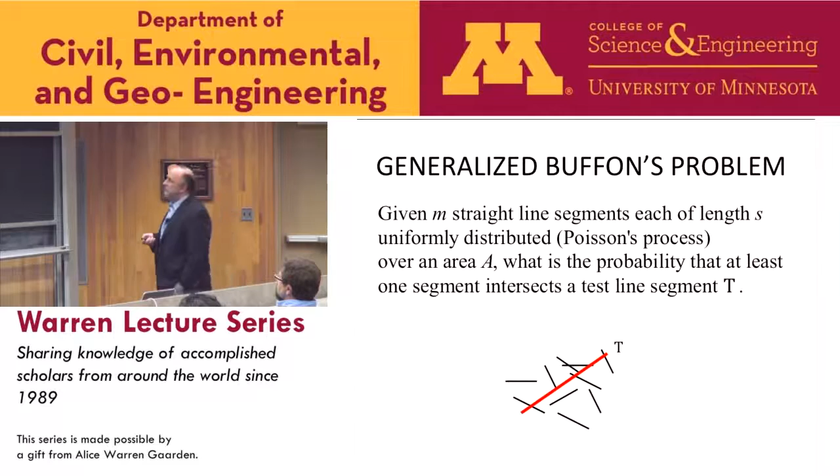I'm interested in having m segments of the same length. They're randomly thrown on the plane over an area A, and I would like to figure out the probability that at least one segment intersects a test line segment T. So the red guy is the test segment, and I'll be using it to probe the population of short segments.

Now, it is very easy to argue that if my test segment has an orientation phi, and the segment of interest, S, the green guy, has an angle phi prime such that the angle between these two is the absolute value of phi minus phi prime, then as long as the center of the green guy lies inside of this parallelogram, it will intersect the red segment.

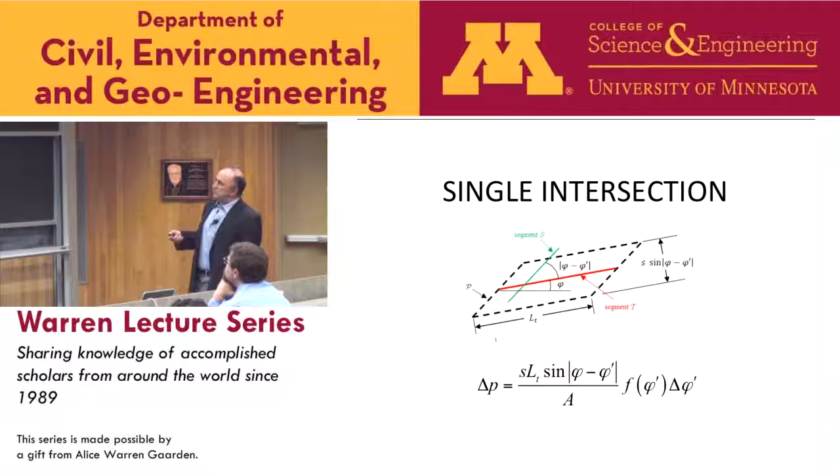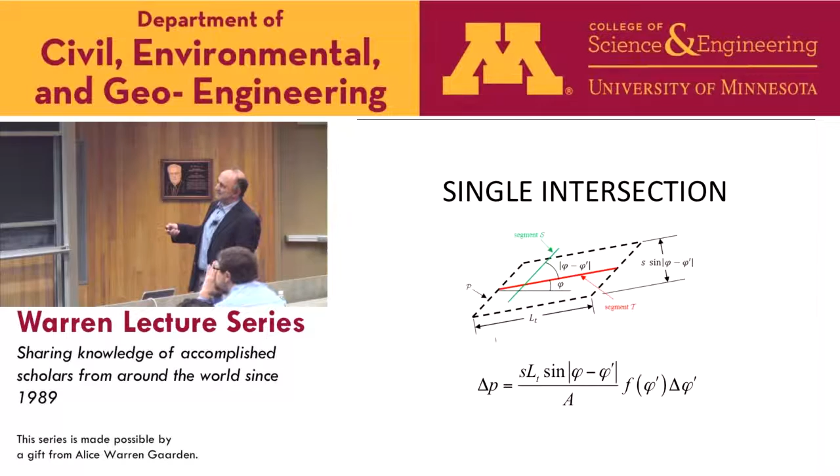So the calculation looks like this. If I look at the probability, this is the area of the parallelogram. This is the area occupied by all the segments. So the ratio of the areas is given by this term. And F is the probability density function, times delta phi. This tells us what portion of the segments have the orientation angle phi prime. So this is inside the parallelogram, and this is the properly oriented segment.

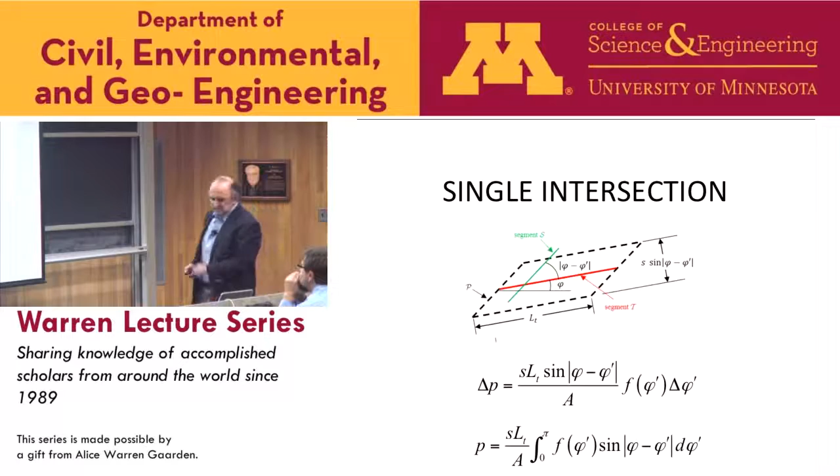And when I calculate the probability, I simply integrate, and I have this expression. This is for one segment. If I have the probability of n intersections, I have a Poisson process, and I'll get something like this. And the mean value for having n intersections with the segment is given by this formula.

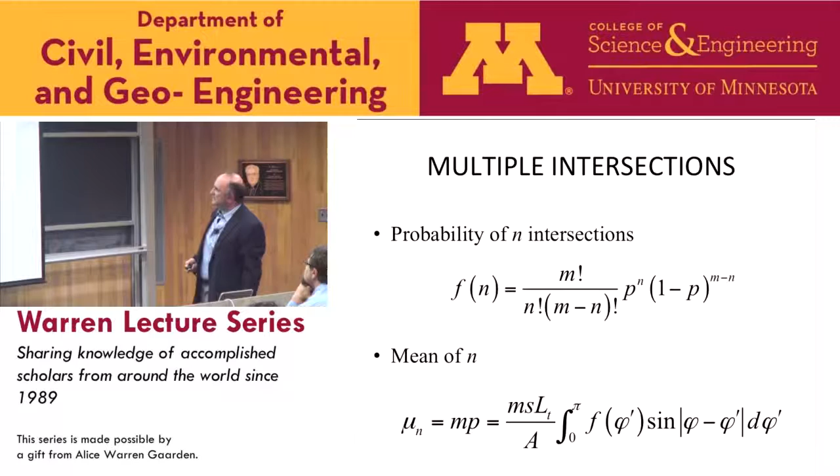What do we really need to take home? Please take a look at what we have here in front of the integral, and that really will be very important. So first, let me go back and say I will divide this mu n by L sub t.

And when I do that, that should be... Yeah, that's correct. Right. So this will be the linear intersection density along the segment oriented at the angle phi, right? So this is 1 over length. The other thing that is left is linear fiber density. Linear fiber density is the length over the area. It's 1 over meter, okay?

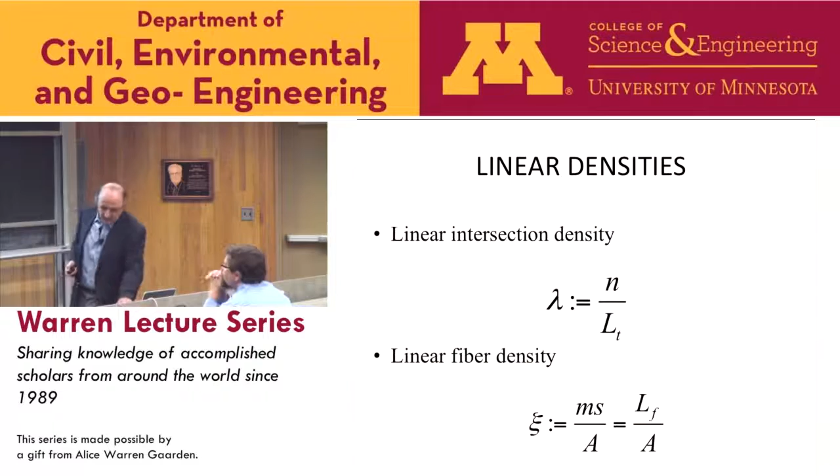And in 2 dimensions, it turns out to be the natural parameter. Not the volume fraction, but 1 over meter. I could have the volume, because the volume fraction will be attached to a particular diameter. This thing is not attached to any diameter, and if you've seen things about dislocation mechanics, is this here, right? It's not a dimensionless quantity, it's length per area in 2D, right? And so this is a very important thing. And this parameter xi I will keep around, okay?

And then I can calculate pretty much what is mean linear intersection density, and you see it's scaled with xi. And then areal intersection density, I just do another integration, and it's scaled with xi squared. And here I wrote the expressions, what it is for isotropically distributed fibers. In other words, when F is 1 over pi, right? Then I can calculate these integrals, and I get this.

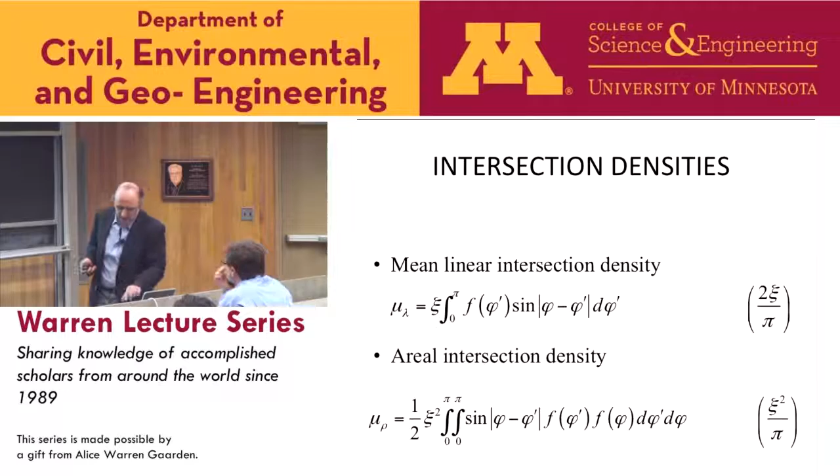Now, intuitively, what this means is the following. If you want to think about your specimen size, you don't think about how big it should be. Rather, you think about how densely it should be packed. And I talked to Boyan earlier today, and actually, you know, we had an interesting discussion. He looked at it from a different angle, but I think we're on board with this conclusion.

Okay. Now, I have these formulas, but these formulas are kind of good checks. What I would like to do now is create an algorithm that will allow me to do mechanical simulations. And the algorithm is nothing but a bunch of random walks. Each fiber is a piecewise straight line, right? And each segment in the fiber can rotate with respect to its predecessor, but the rotation is limited. So I decide on how to limit it. And I put it all together, right? And it's a periodic array.

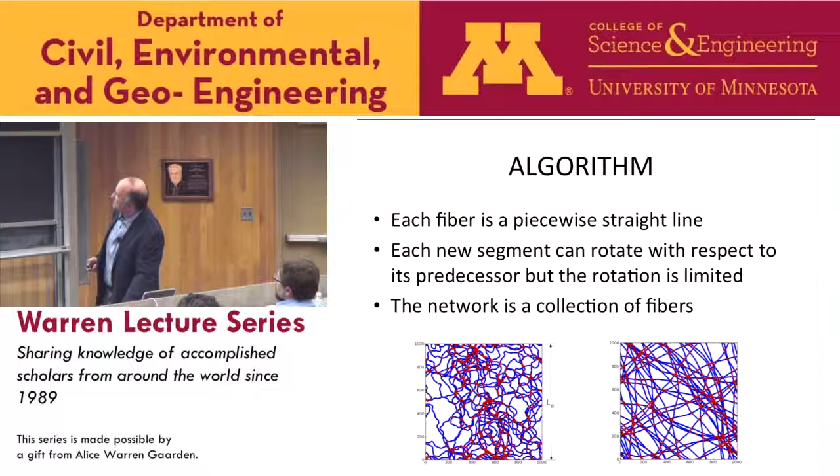And these are 2 examples. And I want to demonstrate that in this example, we have tortuous fibers, right? And here are quasi-straight fibers. And the difference between these 2 is controlling the rotation of the segment. Okay? So we can take this algorithm and create random walks and pretty much control a lot of things. And the first exercise was to see how many fibers we need to achieve what we want, right? Or to achieve representative properties.

There are also issues related to not only the box size, but also how well in our simulations we can achieve the target ODF, or the target orientation density function. So when we form the fibers, we do not necessarily get the isotropic or very close to isotropic. It takes some effort to get there. And here's the next picture that shows what it takes, all right?

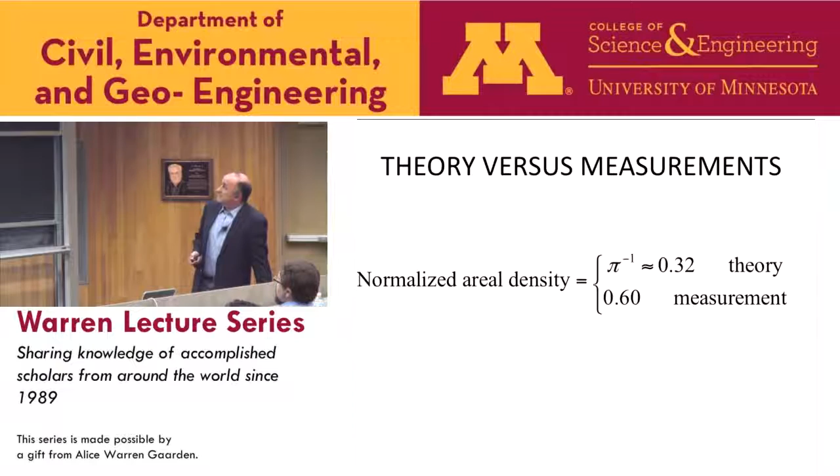We have 0.32, we got from the measurements 0.6. We spent quite a bit of time trying to figure out where the factor of 2 is missing. Once we exhausted that, we called the fellow who got 0.6, and we said, we have problems. Could you check? Oh, he said, very good.

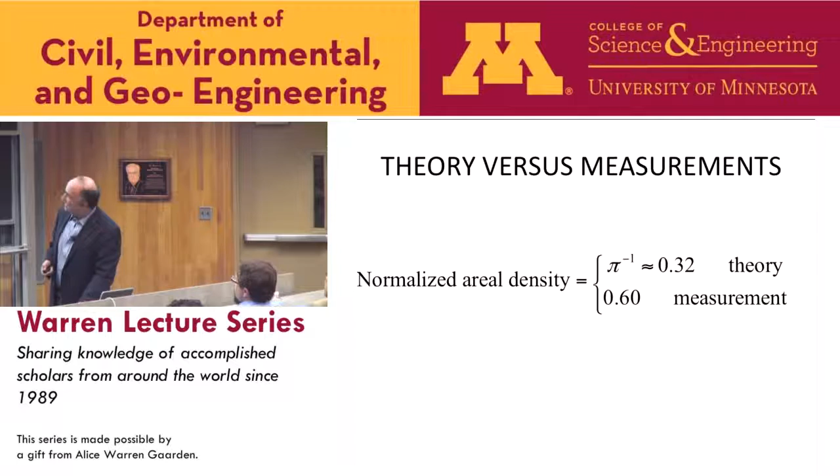This I got by looking at the images, but I just developed a great program that allows me to computerize the reading from the micrographs. And so I'm looking at all of these pictures now. No, 0.6 was computer count. This is human count. This gives you an idea how hard the field is in terms of getting the data,

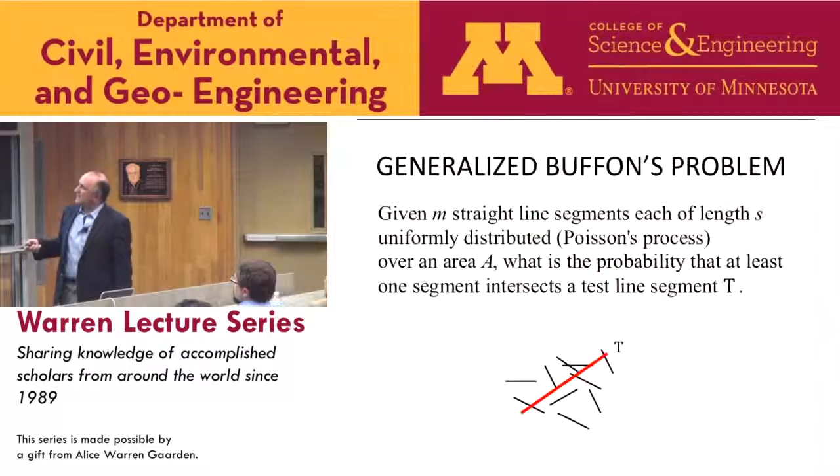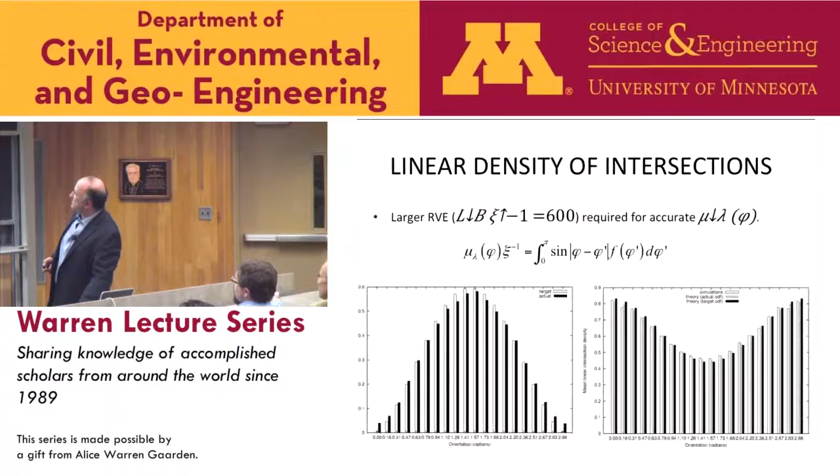Now, here's a picture of a multi-layered thing. The coloring here is to indicate that we have 40 layers, right? And the way this thing was generated, you produce layer by layer, and then you superpose layers such that neighboring layers can form contacts with the fibers, with the neighbors, right? And this is not exactly an Abaqus type of run, all right? You need to run it in parallel.

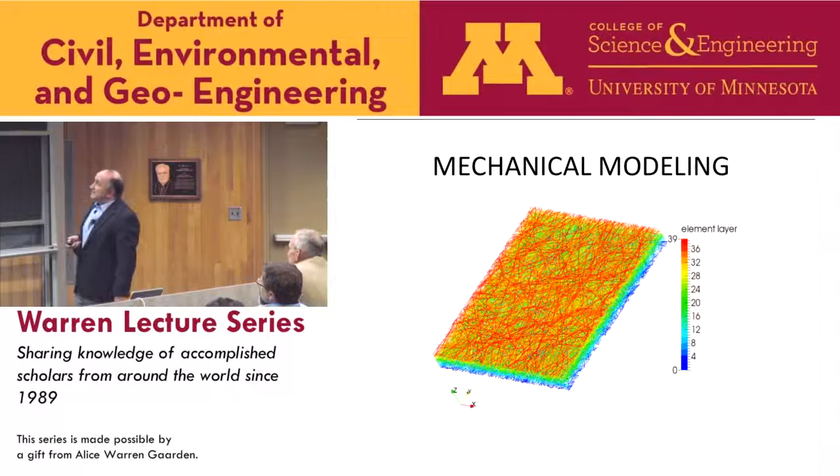I had another picture which was showing colors when you do partitioning on processors. But a lot of computations were done here. They're large-scale computations done in parallel. That's point number 1. Okay. Then let's talk a little bit about what went into modeling assumptions. All right. So I take fibers, I assign them mechanical properties and diameters. Okay. Fibers are Cosserat rods.

I could have talked for a long time and given a really detailed and boring speech about Cosserat rods. They're not easy things. I'm not going to tell you anything about it. It's something that is pretty well established, and it was a matter of figuring out which theory to take. And we picked something that is reasonable, let's say a hybrid of what we found in the literature. But I'm not going to advocate it as much better than anything else. It's just we liked it.

Okay. In-plane periodic boundary conditions, plane stress or no stress in the transverse directions. Intersections are welded. It means that there's no slip or no relative rotation in the contact. We don't take contact deformation into account. What this means is that if the fiber initially doesn't contact any fiber and there is a contact, we just disregard that thing, we let them go, right?

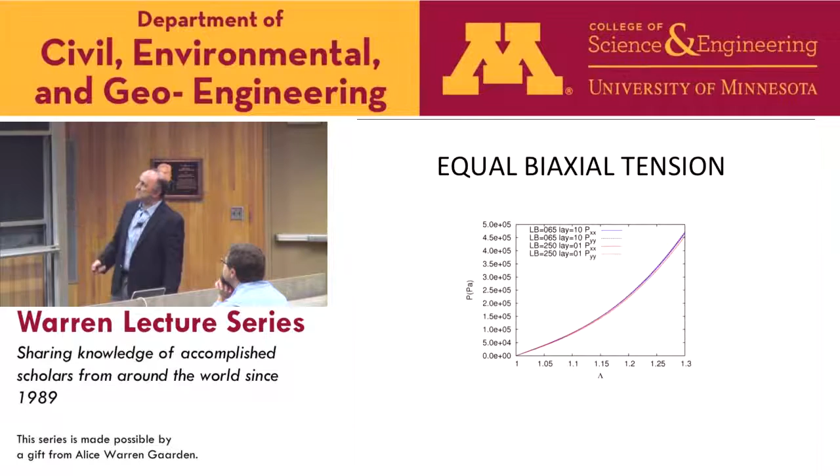And we subjected these things to equal biaxial tension, and here are the results. It is absolutely clear that we have a pretty biaxial situation here, right? Isotropic material. We plot stresses, second Piola-Kirchhoff, PXX, PYY, and all curves collapse. So basically, A, we have an isotropic story. B, the difference between a monolayer versus 10-layer is immaterial. We're getting the same response. We tried other loadings, and that's also true.

Now, what this tells us immediately is the following. In multi-layers, because the fibers from each layer are in contact with the fibers from adjacent layers, the distance between contacts is small, roughly a factor of 2 or 3 smaller than here, because here there are no additional contacts coming from the neighboring layers. If the distance between contacts is immaterial, but the fiber fraction matters, then you say, look, does bending deformation play a role? Because bending deformation is very sensitive to the length of the beam. And that gave us this indication.

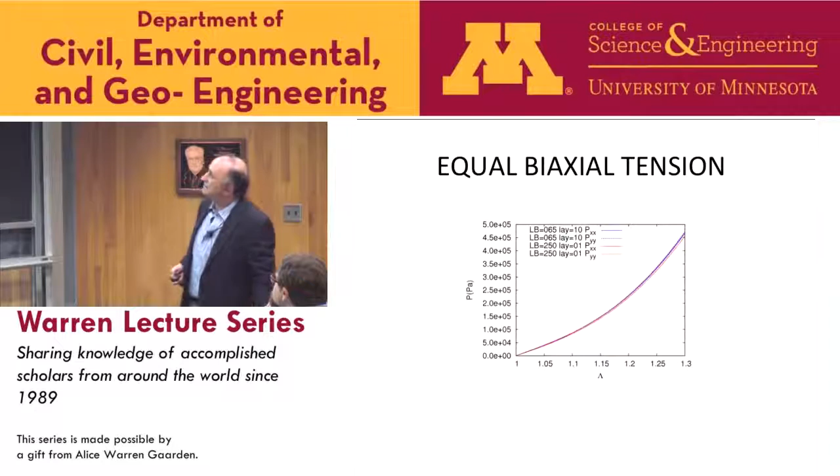And to follow up on this, we calculated the ratio of the axial energy to the bending energy. This is the stretch, right? So we went to 1.5, roughly 50% strain. And as you can see, only at the very beginning is there anything going on for the bending energy. At the end of the test, there are 3 orders of magnitude.

So I mentioned that this is a frame. Yes? A frame is dominated by bending energy. There is no question about it. But this is a weird frame in the sense that these guys are very flexible. They actually have some tortuosity. And they realign themselves in such a way that you pretty much stretch a bunch of straight fibers in uniaxial tension. Another bunch of fibers not only doesn't work, it tends to buckle, right?

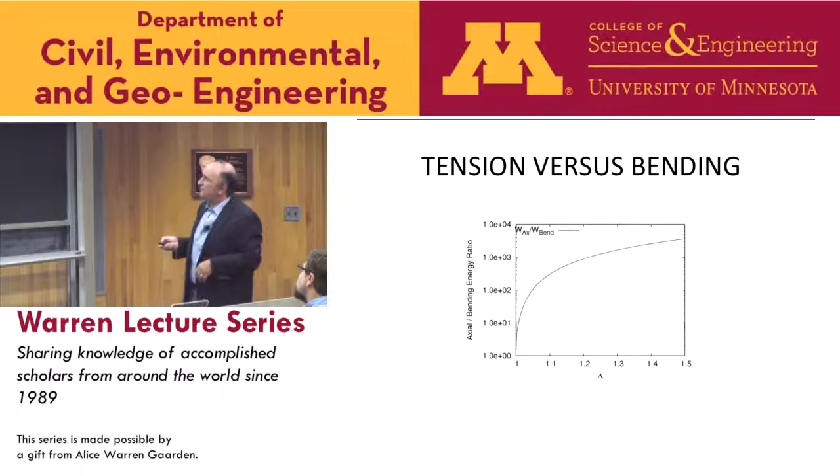And so it very quickly reconfigures itself from a kind of frame-like structure to essentially a bunch of power lines that transmit axial stresses, line stresses, and the rest of it is not functioning. Okay. I will come back to this a little later, but let me talk about affinity of evolving ODFs.

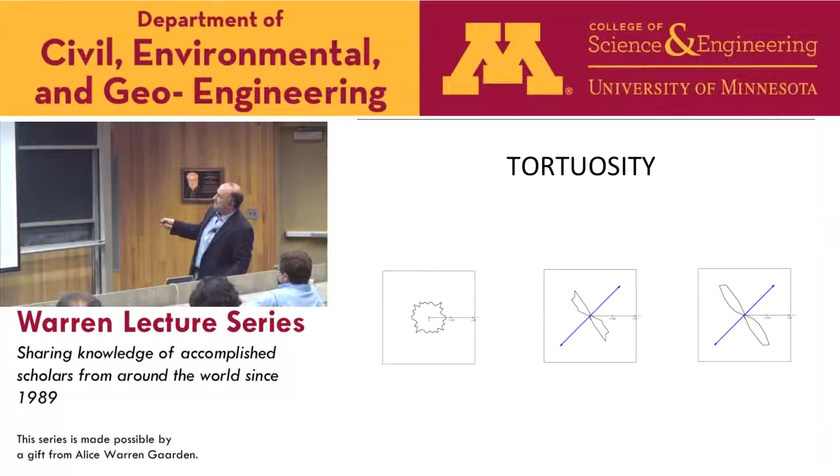There is increase in tortuosity in the direction perpendicular to the stretching. What this means, the fibers not only do not straighten in the direction perpendicular to the maximum principal stretch, but they actually become tortuous, buckling, right? You have buckling and tortuosity. The fibers become straight, right?

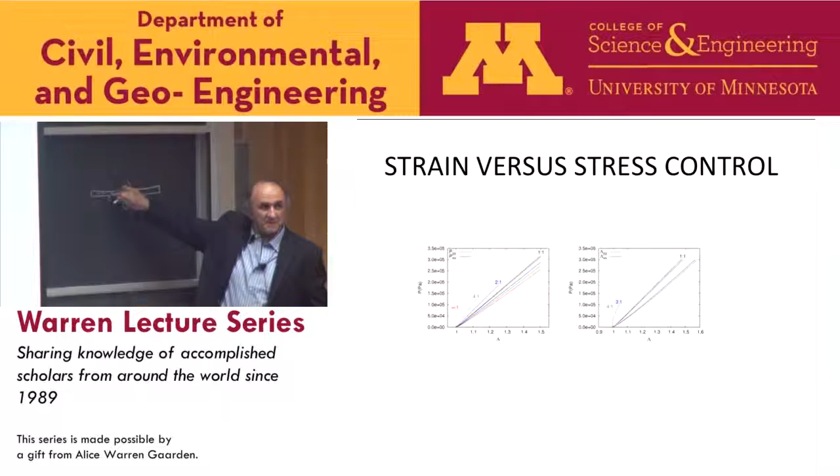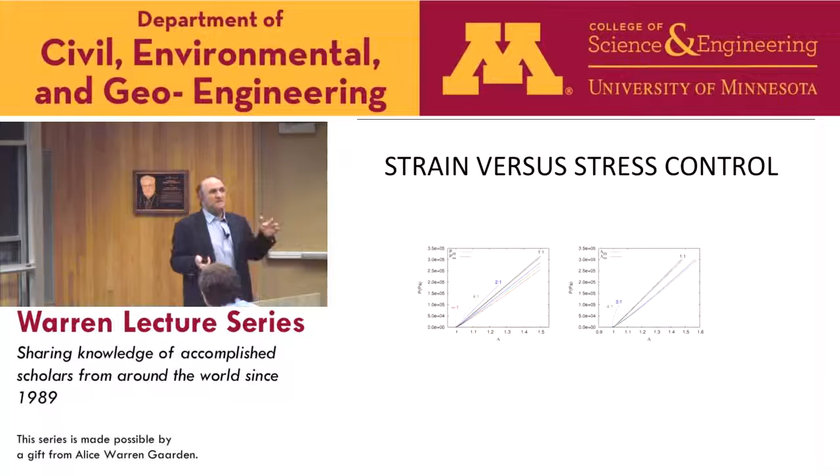So if you have, let's say, a layer in the middle, then roughly the number of contacts in such a layer will be 3 times more than in a single layer. But there will be no fibers going in the perpendicular direction? No. Fibers go out of plane when we deform, right? This happens. But as I mentioned, if you want to start with a genuine 3D problem, you need to deal with random walks in 3D, and that's a killer. It's really hard. I understand that. Yeah.

Right, right. Yeah. The second issue is, I've seen presentations where there is tissue adaptation to the stress, how this tissue works. So there is a reorientation of fibers. This is completely random, it seems to me. For instance, if there is a tissue in the heart valve, there are some preferred directions, and most likely the fibers are oriented in some preferential direction.

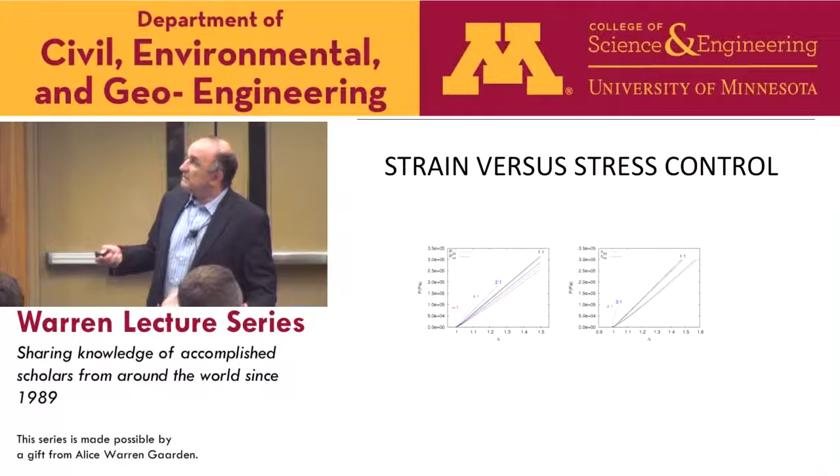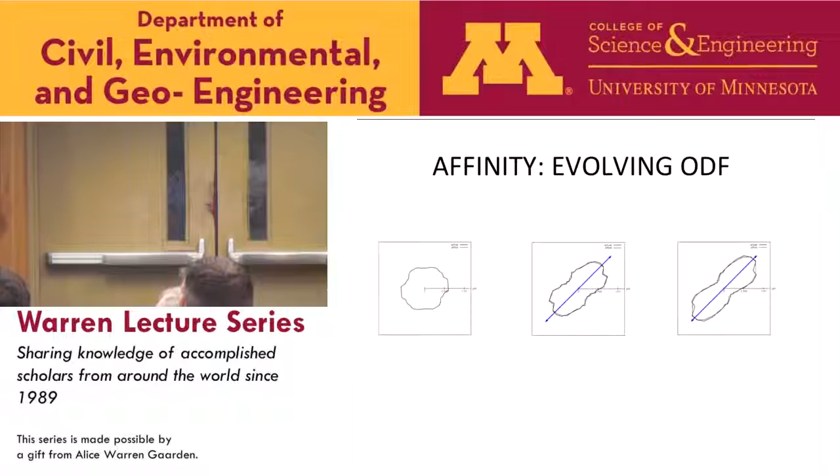Right. I guess you can have it by the probability density. Sure, but here's the picture, right? This is the probability density in polar coordinates. These are polar plots. You start with something that is quasi-isotropic. Then you stretch it, and that's the principal stretch direction. You can see your ODF in this direction is pretty large, and it is pretty small in this direction. So that's as a result of deformation.

Absolutely. But if you repeat that process many times over time, then there will be permanent location of the fibers in the specific directions. Okay. These are elastic systems. No, I understand, those are the assumptions, but in reality, that's what I'm saying. Yes, absolutely. Obviously there will be some viscous effects plus inelastic effects, let's call them. You're absolutely right. They will be aligned. There is no question about it. Yeah.

So I'm really interested in this. I produce carbon nanotubes that look very similar in the nature of the alignment and the porosity that you're getting. You made the statement that it's easy to determine fiber length. I would love if you tell me how, because we cannot determine fiber length at all. I have grad students that will follow in a TEM and eventually lose one end because they intersect. How are you determining fiber length experimentally?

It's a good question. You know, I don't do experiments, so it's very easy for me. But okay, let me say this. What is probably hard to control there: the fibers break during the process, then they restart the machine. But my understanding is the fiber diameter is pretty consistent. And then more or less, you could take the total mass of the fiber that you use and do the calculations to figure out what the fiber length will be. That's point number one.